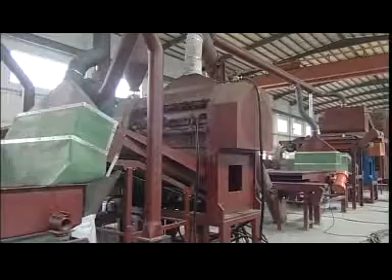Along with the rapid development of the automobile industry, black pollution generated by waste tires increasingly threatens the environment. Dongguan Yuntong Environmental Protection Technology Company Limited, hereinafter referred to as Yuntong, is a leading high-tech enterprise specializing in research, exploration, production, and marketing of tire recycling equipment and application of crumb rubbers, committed to environmental protection and sustainable development.

Dongguan Yuntong Environmental Protection Technology Company Limited is a high-tech enterprise mainly focused on research, exploration, production, and marketing of tire recycling equipment, as well as application technology of crumb rubbers. The company can also provide all kinds of services for customers, such as mechanical design, manufacture, installation, debugging and maintenance, and staff training.

Yuntong is located at the world's manufacturing base, Chang'an Town, Dongguan City, known as the World Factory. The traffic here is very convenient. It's neighbor to Hong Kong and Shenzhen to the east and Guangzhou to the west. Meanwhile, it is close to many deep-water ports, such as Shenzhen Yantian Port, Shekou Port, Humen Port, etc., and Shenzhen Baoan Airport, only 20 kilometers away.

The production base of Yuntong can process 150,000 tons of waste tires annually. Besides, the economic and technical indicators of the whole production line project on manufacturing crumb rubbers from waste tires at room temperature are in the leading position among domestic and foreign similar industries.

Yuntong is awarded as a high-tech enterprise in Guangdong province. Yuntong has established a worldwide sales network, and its products are exported to Russia, Iran, Hong Kong, Malaysia, and mainland China. It has won good reputation from vast customers thanks to its exceptional quality and good service.

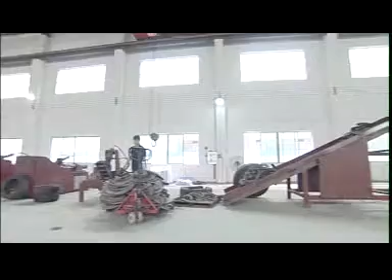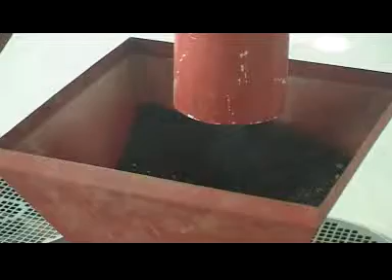Crushing waste tire at room temperature is the world's most economical method. Yuntong has complete first-class equipment and technology to crush waste tires at room temperature and produce wire, nylon fiber, and rubber with the crushed tire. No waste gas, wastewater, or industrial residue is produced during the procedure, which strictly complies with environmental protection requirements.

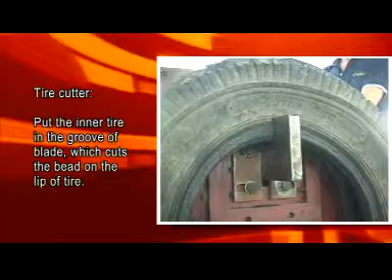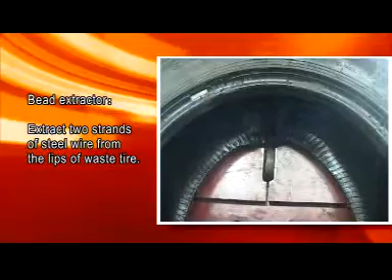Waste tire processing equipment and main procedures are as follows. Chapter 1, preparing working procedure. Tire cutter: put the inner tire in the groove of the blade, which cuts the bead on the lip of the tire. Bead extractor: extract 2 strands of steel wire from the lips of the waste tire.

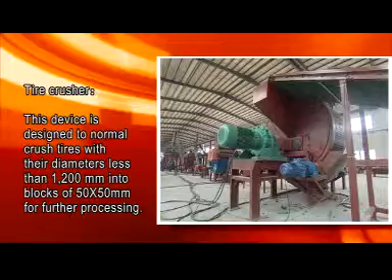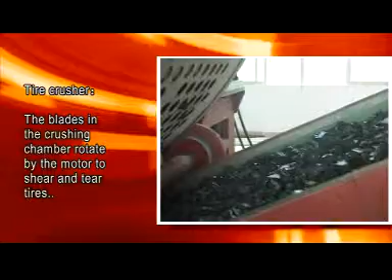Chapter 2, crushing equipment. Tire crusher: this device is designed to normally crush tires with diameters less than 1,200 millimeters into blocks of 50 by 50 millimeters for further processing. The blades in the crushing chamber rotate by the motor to shear and tear tires.

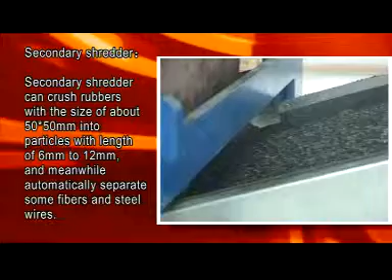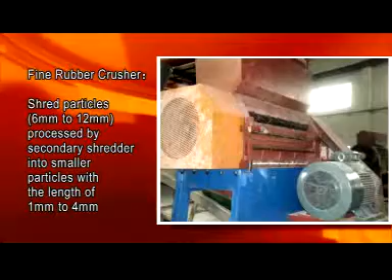Secondary shredder can crush rubbers with a size of about 50 by 50 millimeters into particles with a length of 6 to 12 millimeters, and meanwhile automatically separate some fibers and steel wires. Fine rubber crusher: shreds particles of 6 to 12 millimeters processed by the secondary shredder into smaller particles with a length of 1 to 4 millimeters.

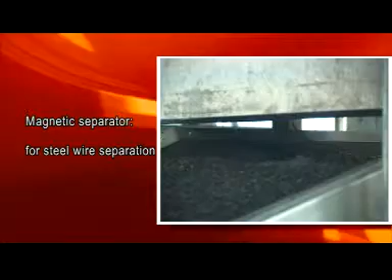Chapter 3, steel wire and fiber separation equipment. Magnetic separator for steel wire separation. Air separator for fiber separation.

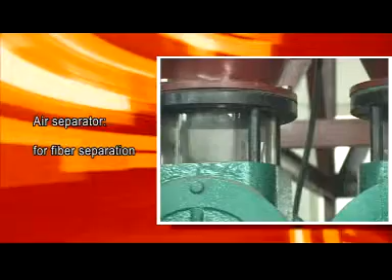Chapter 4, rubber grinder. Grind 5 to 15 mesh particles into 40 to 120 mesh fine crumb rubbers.

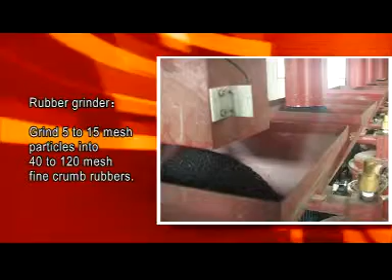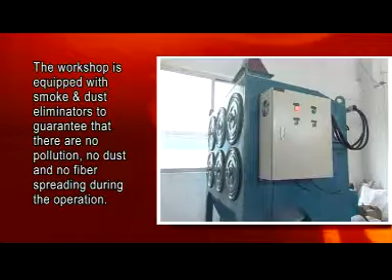Chapter 5, smoke and dust eliminating equipment. The workshop is equipped with smoke and dust eliminators to guarantee that there is no pollution, no dust, and no fiber spreading during the operation.

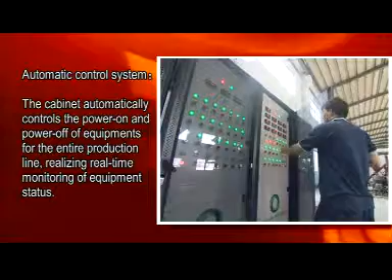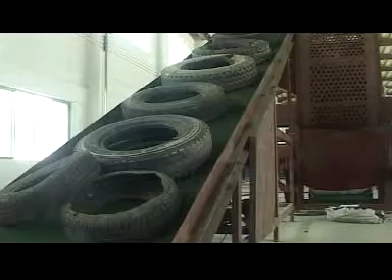Chapter 6, automatic control system. The cabinet automatically controls the power on and power off of equipment for the entire production line, realizing real-time monitoring of equipment status. The waste tire processing production line of Yuntong is energy-saving, labor-saving, cost-effective, safe, reliable, and convenient in operation.

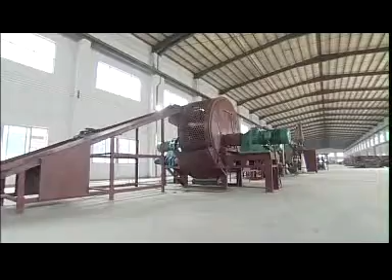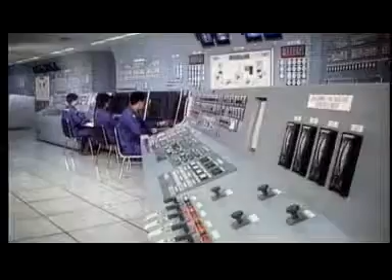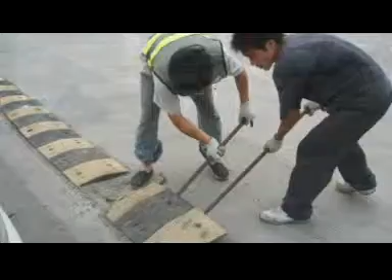With social development, natural rubber cannot meet industrial production demands. Rubber is regarded as a strategic resource, and waste tire recycling has become the development mainstream of current society. Known as industrial black gold, crumb rubbers play an increasingly important role. They are widely used in fields such as sports grounds, golf courses, amusement parks, waterproof materials, road construction, and so on, contributing great economic and social benefits to the world.

Yuntong adheres to the principle of customer first and provides comprehensive and thoughtful post-sale service to customers as follows: 1. We arrange technicians to assist installation and debugging as soon as the cargo arrives at the destination. 2. We provide instruction and training on operation of the equipment. 3. We timely deal with letters and visits from customers to reply to their consultation, and provide lifetime technical support for customers.

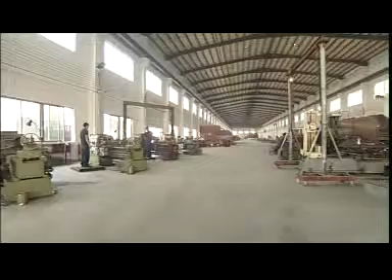Yuntong has a strong sense of responsibility and mission, which takes waste tire processing and environmental protection as its development direction, and being the leader of waste tire processing equipment as its development objective. It adheres to the business concept of being dedicated, professional, scientifically and technologically innovative, progressing, and high-quality brand, and creating benefits for users. We warmly welcome all friends at home and abroad to visit our company and to work together for a brilliant future in the field of waste tire recycling economy.